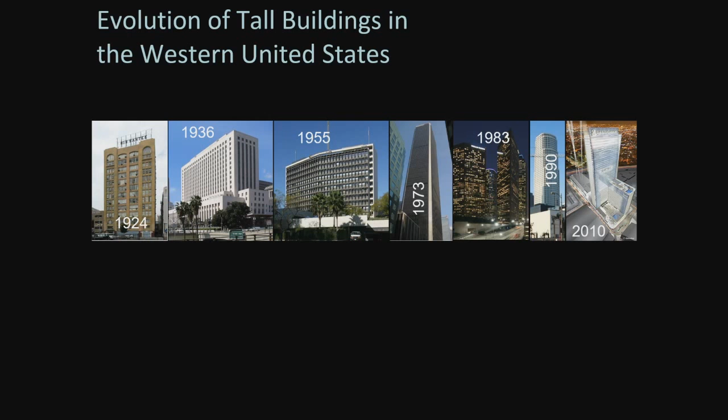Go back into the 1970s, and the software was much less advanced. We were mainly using linear computer programs at the time. But at that time, there were tremendous advances possible in construction because the computer was available and enabling engineers to extend their thinking in design and construction.

Now, 1936 was also a very important time in the structural engineer's development of computational procedures—no, definitely before the computer. This fellow, Hardy Cross, was a professor at the University of Illinois, and Hardy Cross developed some very important analysis methods, one of them known as the moment distribution method.

How many have heard of the moment distribution method? A few of you. And students have only heard of it because we tell them we don't teach it to them anymore. But it is instructive to see what Hardy Cross had to say about it.

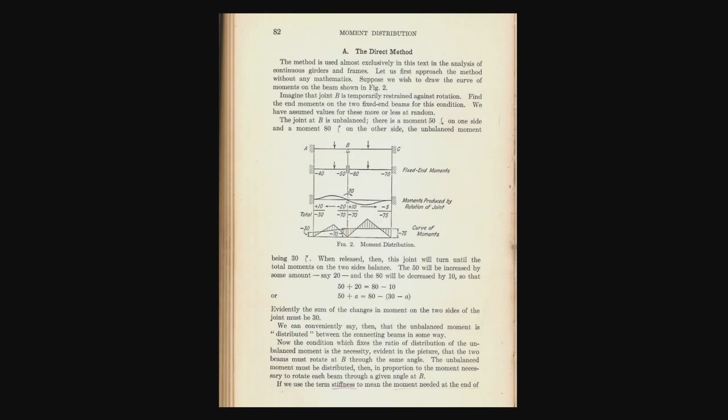The idea: if we had a beam across 3 supports and we didn't know how to solve the problem, we could fix the rotation of the middle support, apply the loads—we know the solution for that case. We can find the imbalance in moments at these supports and say, let's use linear superposition and add a moment in the opposite direction and free this joint, so there it is. Voila, there's the solution. This way of solving problems for structural engineers had a huge impact in structural engineering in the 1930s, 40s and 50s.

I understand that Hardy Cross also had some impact on hydraulics—is that correct? I think so. I doubt if you're using Hardy Cross methods there anymore either.

Hardy Cross also had some very interesting things to say about standardization, and that's a subject that ties in very closely with what I'm talking about today—performance-based design as opposed to standardization. Let's see what he had to say. He says, as the size and complexity of projects increased, it became desirable and even necessary to set up a series of routine procedures for analysis and design.

Fair enough. With these standardized formulas and specifications and methods, it became possible to use a greater number of men, and men with less training, to produce engineering works.

Now, forgive me, those were Professor Cross's words. You have to understand it's 1952. To bracket my age a little bit, Khaled, I wasn't born yet, so you can't quite blame me for this one. At the time, most of the engineers were men. Berkeley was way ahead of the times, of course.

Julia Morgan, a very well-known architect and engineer, graduated from Cal in 1894. She was the only woman in the graduating class. But apparently Professor Cross didn't pay attention to what was going on in forward-thinking parts of the country.

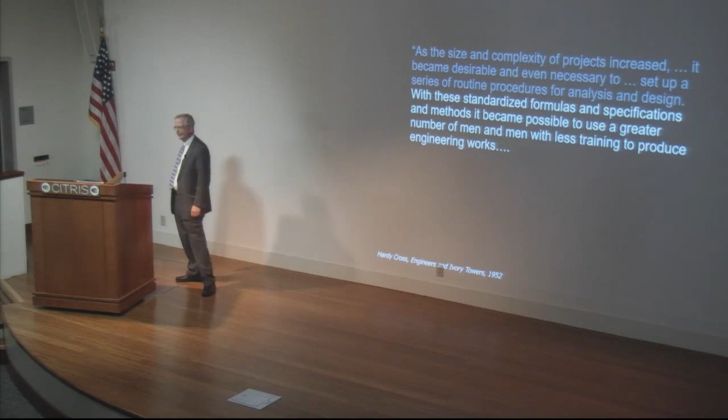But what he says here—get over the men and women business—what he says in this line is kind of shocking. It allows it being possible to use a greater number of men and women with less training to produce engineering works. And one has to wonder, is that really what standardization is about? In a way it is. In a way it is.

And he writes then, as a check on fools and rascals—the fools, those who don't know so much, and the rascals, the ones who know a lot but want to get away with something—or set up as an intellectual assembly line, has served well in the engineering world.

Hardy Cross is very often quoted because of his mention of fools and rascals. But I think this statement about standardization is shocking. I think we should consider that standardization really, in a way, is set up so that engineers can do more with less knowledge, and it'll still be safe. Just think about it. I'm not promoting that as a way forward. I'm just commenting that that's what we might think of when we think about standardization and not being allowed to design outside of that standardization box.

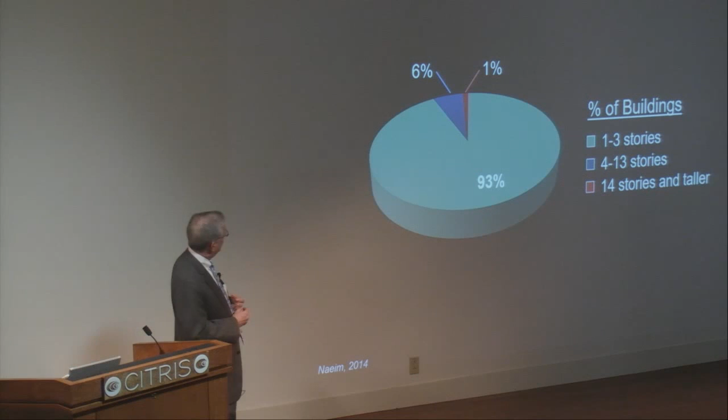Standards work really great in the building industry for most of the construction. If you look at the construction that goes on in the United States, 93% is 1 to 3 stories. Not very interesting to most of us, although there are some fascinating buildings in that group. 6% is 4 to 13 stories. The 1% is 14 stories and taller. And the kinds of buildings that I'm mostly interested in talking about today are even a fraction within that 1%.

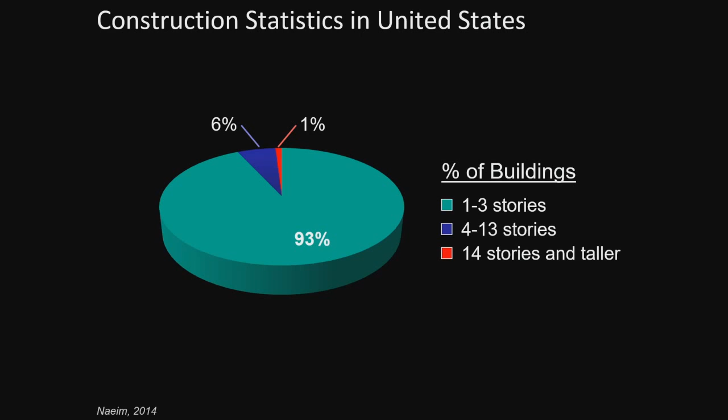It's a tiny fraction of the buildings. And it's natural that the standards that are written up are written mainly for the 93% — those are the buildings that are more routinely being designed. As we squeeze into the 1%, the standards really don't work so well, at least in many cases, for those buildings. Here's a smattering of some of the building projects that I've worked on over the years.

The top are the Bay Area buildings, the ones in Northern California. And down below is Southern California. Starting back 15 years ago or so, and then some projects that are still in the works today.

The two buildings on the right: Salesforce Tower in San Francisco is under construction and was intended to be the tallest building on the West Coast, west of the Rockies. Then along came Wilshire Grand, which is about 20 feet taller. So they've scooped the Salesforce folks, perhaps. But these are the kinds of buildings that I'm interested in mainly.

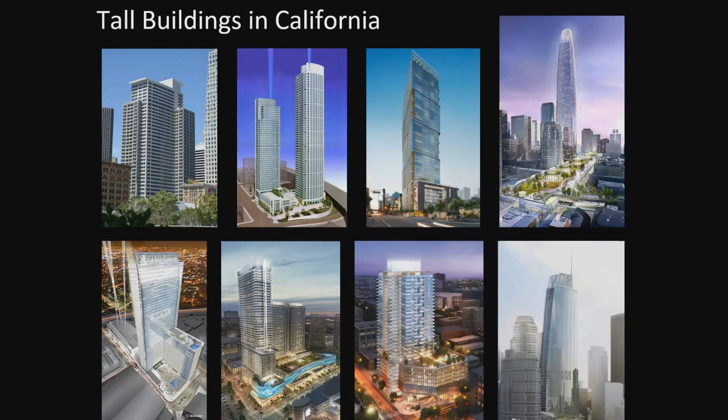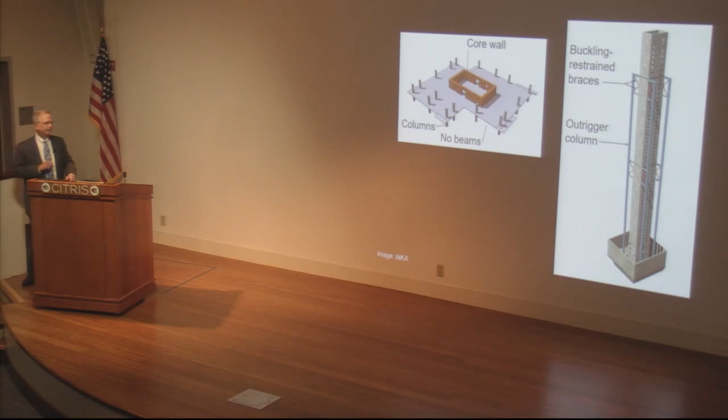These buildings are different from what's typical in our written building codes, in our standardized codes. In the code, there are height limits for certain kinds of buildings. A core wall building, a building that resists lateral loads solely by the core that the elevators and stairs are in, is only allowed up about 15 stories or so, depending on your story height — you might be able to squeeze it in there.

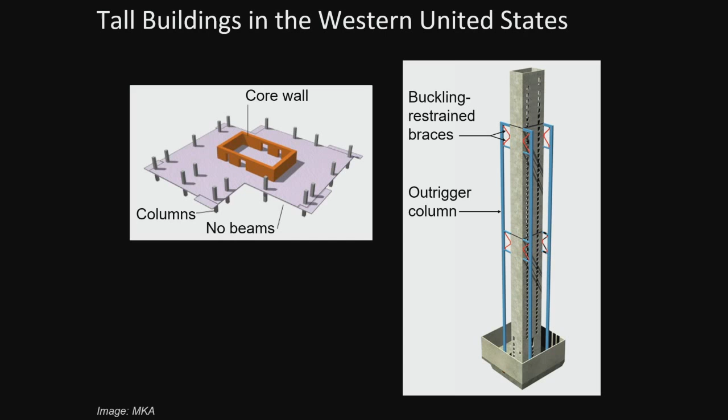These buildings are going up 60 stories tall, so they're way outside of the height range that the code was intended to be used for, the standardized part of the code. Then we're beginning to mix conventional core systems with things like buckling restrained braces as outriggers. These combinations of systems aren't recognized within the standardized code, and you pretty much have to design these by something different.

Starting about 10, 12, 13 years ago, there began to be some pressure from the structural engineering community, architects, and developers to design something outside the code that would be taller and more functional. It was kind of the Wild West for a while because engineers had no guidance. One engineer would be designing a building one way across the street, the same engineer would be designing the same building differently.

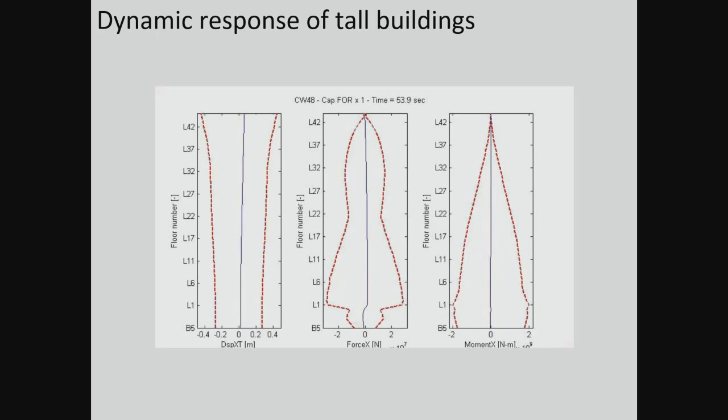There would be peer review panels checking the work. On one building, the peer review panel said, 'I'm not going to approve this building if you put that in there.' And across the street, an almost identical building, a different peer review panel was saying, 'I'm not going to let you design the building if you don't put it in there.' So totally opposite views were being expressed about how to carry on this work.

Seeing an opportunity and, in fact, a need to move practice forward, we started about the time of the centennial of the 1906 earthquake — around 2006 — in the PEER Center, a program to develop performance-based guidelines, ways to use analysis and testing and so forth to build these taller buildings that would perform better in predictable ways, but with some organization, some guidance. I worked with practicing engineers from Seattle, Los Angeles, San Francisco, researchers up and down the West Coast, and building officials.

We pulled together a program worth about $2 million for analytical work and developing guidelines, and we published this in 2010. We had absolutely no authority to do this — we just did it, and we put it out there. It was immediately picked up by practicing engineers, and it's become probably the most widely used document for performance-based design of tall buildings, not just in the US, but around the world.

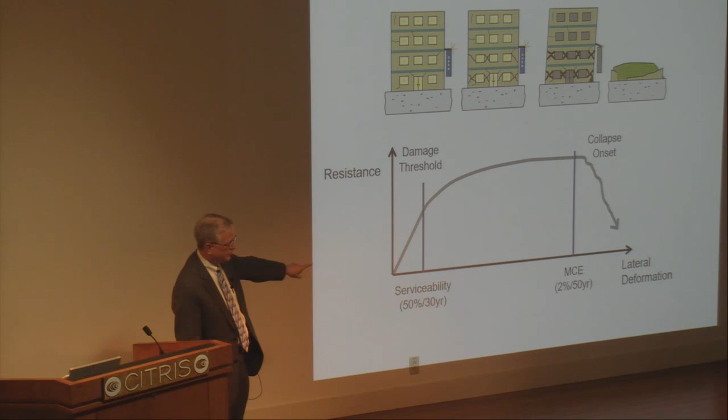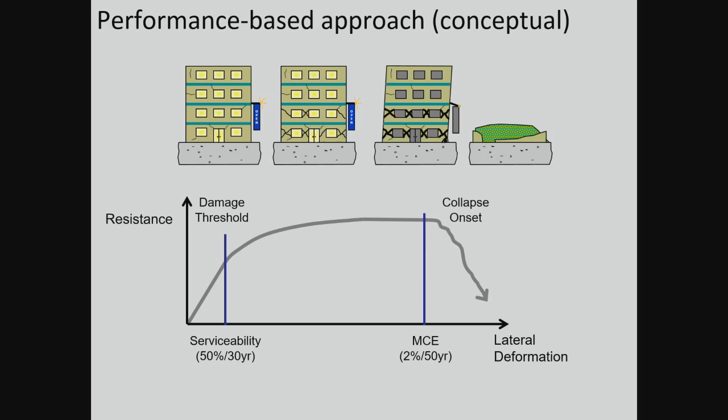And we set two limit states. One, it should be serviceable in some reasonable time frame. Two, it should have a margin against collapse for something that we think is the biggest that might ever happen. So we pick the biggest event as something that's got like a 2,500-year return period. In coastal California, we like to live dangerously, and the risk is a little higher here where we're close to faults. But it's a very rare event that we're talking about.

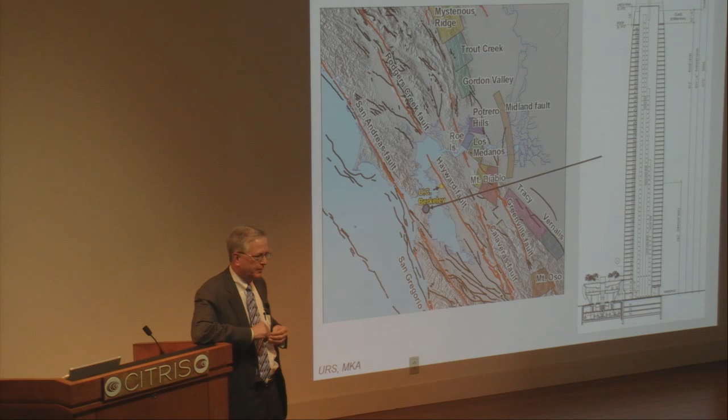Now, the way the engineer goes about this process — and again, we'll only cover this on the surface — starts with looking at the ground motion. We live in a very exciting part of the world here on the Berkeley campus. This is actually the fault map that URS used to determine what the seismic risk, the hazard map, should be for the UC Berkeley campus. So there's UC Berkeley shown there. The project I'm going to talk about, Salesforce Tower, is in San Francisco, and it's a very rich seismic environment.

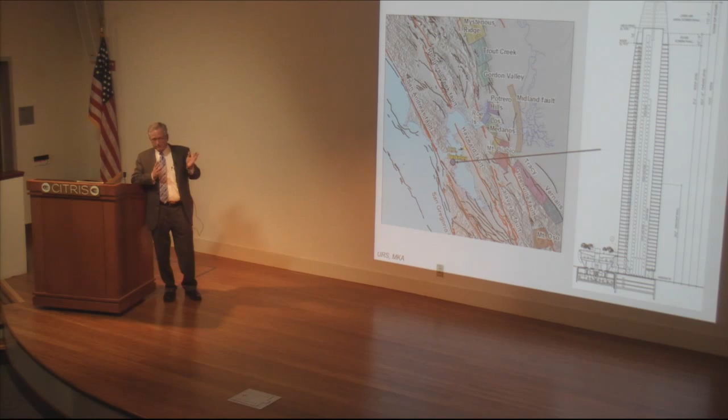Now, what's done in the seismic design of a building as a starting point is to look at all the known faults and think about what the fault segments are, what are the probabilities of individual segments going off or combinations of segments, what are the average long-term slip rates, and from that, what's the range of ground motions that you might get. If you have more questions about this, one of our experts, like Professor Bray, would love to answer — but engineering seismologists and geotechnical engineers work on this problem.

Once there's a sense of what the range of fault rupture might be, we use attenuation models that tell us how the ground motion attenuates from the source to the site. A huge amount of work has been done on this subject by the Pacific Earthquake Engineering Research Center. Is Yousef Bozorgnia in the house today? I think he may be traveling. But Yusuf had a tremendous amount of work related to this in the PEER Center, really using huge databases to figure out how to attenuate the ground motions from source to site. And the PEER models are really all that's used today in figuring out what the design ground motion is going to be.

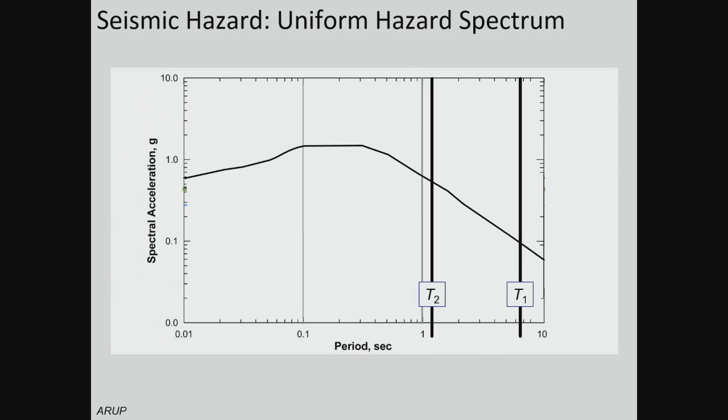Now, there are site analyses, of course. We can estimate what the rock does, and filter that through the ground. In the end, we end up with a response spectrum, which gives us a measure of how a linear structure would respond, in this case acceleration, as a function of its vibration period. Most structures that fit within the prescriptive provisions of the code sit back in the 1 second period range. The buildings we're talking about are off at 4, 5, 6, 7 seconds as their initial vibration period, so they're way out in the response spectrum. This spectrum is used to define the shaking intensity at a site.

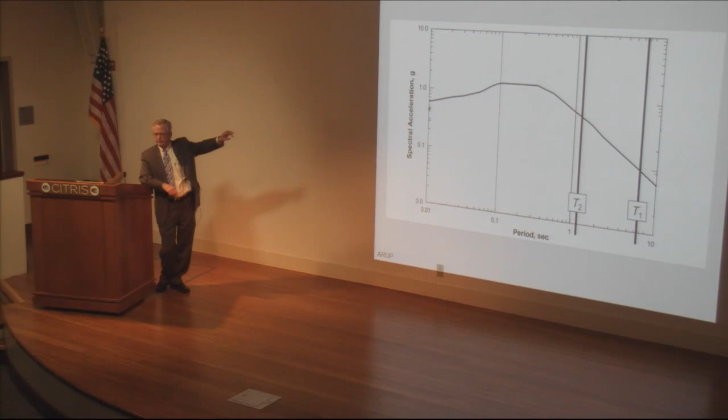There are techniques for filtering ground motions to fit them to these particular periods. I'm a structural engineer, and given time limits, I chose not to cover all that. But ground motions are selected that are representative of the seismic hazard, at the low end as well as up at the high end of the hazard level. It could be for long periods, for the fundamental period of vibration, and for shorter periods. One key thing in setting up the ground motion is making sure the duration is long enough to excite the building and is representative of the hazard.

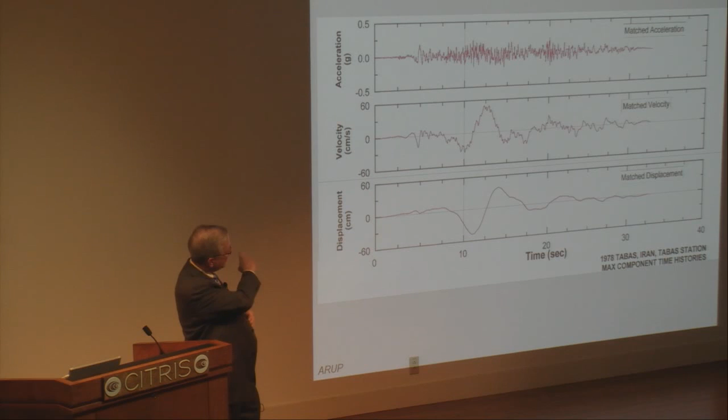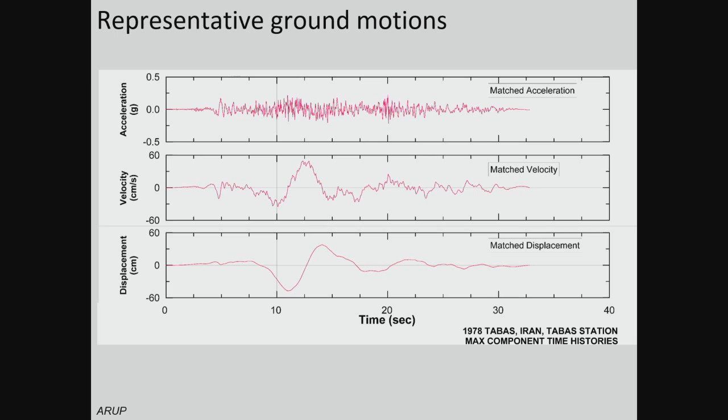If we're in the near field, like on the Berkeley campus, very close to an active fault, we'd want to include an impulsive motion or a number of impulsive motions to excite the structure. Our geotechnical engineering faculty at Berkeley are among the top experts working in this field. Professor Bray participated in the review in setting up some of the ground motions with Arup, who was the engineer of record on this project.

On the structural side, we take the building as it exists and boil it down to something much simpler, an analytical model, quite unlike what we do in the prescriptive code provisions where all we would model is the core. In performance-based design of a building, we model all of the structure, everything that might affect the behavior of the structure and everything that might be affected by it.

So we've got the core modeled. We would model the slab column framing connecting to that, with very complicated, detailed models of how the structure enters into the basement and is fixed into the ground. But the computational procedures today, for the most part, aren't sufficient to allow us to model both the structure and what the soil's doing in routine designs, even for these very tall buildings.

So what we do is generally fix the bathtub, the basement. We model the structure, do the calculations there, and then come back and apply what we get from the superstructure back onto the foundation. There's still some advancement to go on there. The models are simple and yet very complicated.

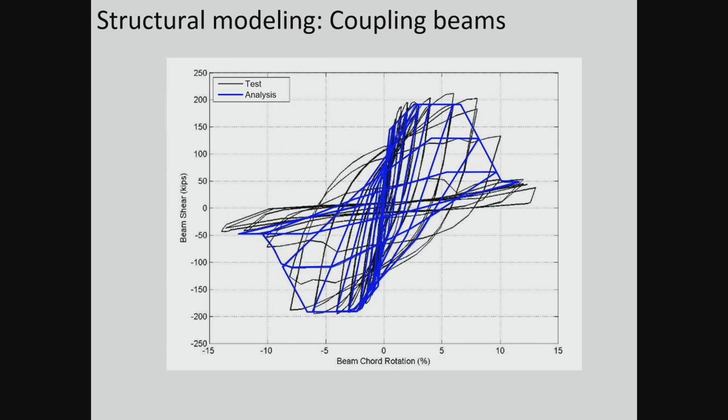This is a typical load versus displacement response for a coupling beam. We're modeling the full nonlinearity and the degradation that occurs at large deformations. Here's what a computer animation might look like as the ground motion starts.

And it's very quiet, but it would be very noisy in that building. It's quite possible one would be seasick up at the top. But if you lived to tell your grandchildren about it, it would be okay.

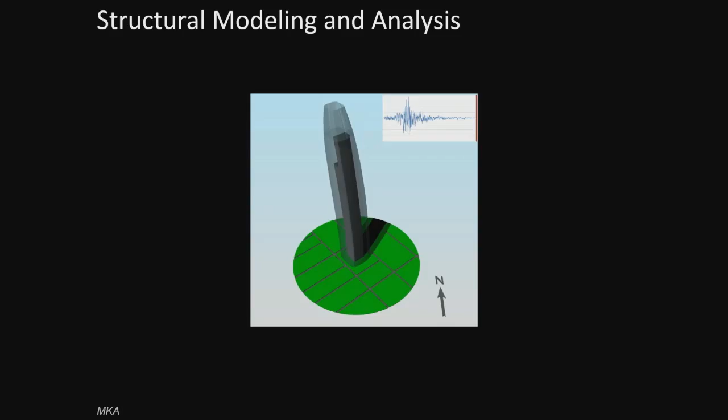Now, these displacements are greatly amplified, okay? So it's not quite that bad, you're not going to be thrown out. But up at the top of Salesforce, one would anticipate the motion to be about 4 feet, plus or minus, not including whatever the ground rigid displacement is. So they're big movements, and seasick, probably, okay?

And then one takes what one gets from the analysis. All sorts of things come out. One of these analyses takes about a day to run, just on the fastest computers we've got. It takes about a day just to run this darn thing.

And we get shear forces, very concerned about shear forces in these core walls, because the core is supporting not just lateral load, but the vertical. So we want to be very sure to get this right, and we can't get this right if we use the prescriptive methods in our building codes.

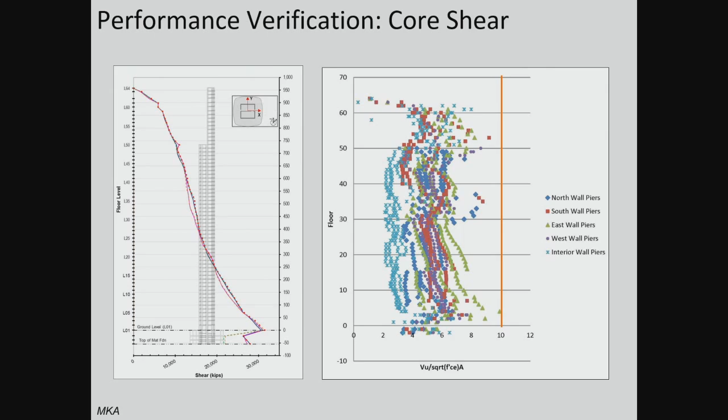It's just not adequate. We look at what the strains are over the height of the building, these are strains in the concrete or the rebar in compression or tension. Professor Filippou, you might note the strains are very small in this. So we may be yielding at some location up at the top where the core cuts back.

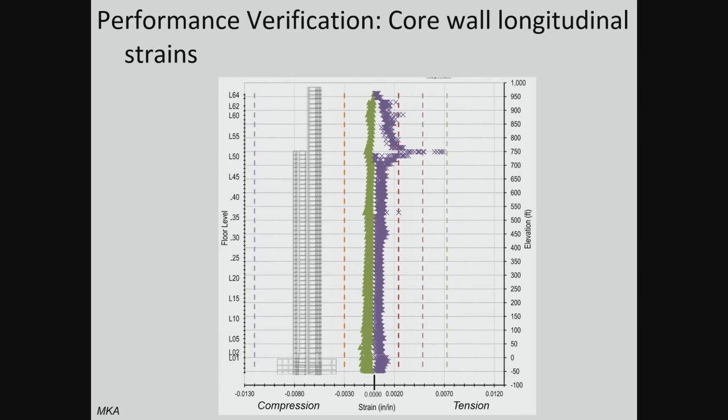The compressive strains are, in this case, well below what we would think to be spalling or crushing strains. These buildings don't develop very large longitudinal strain in the core walls, and that's a good thing. It means the damage is likely to be somewhat lessened.

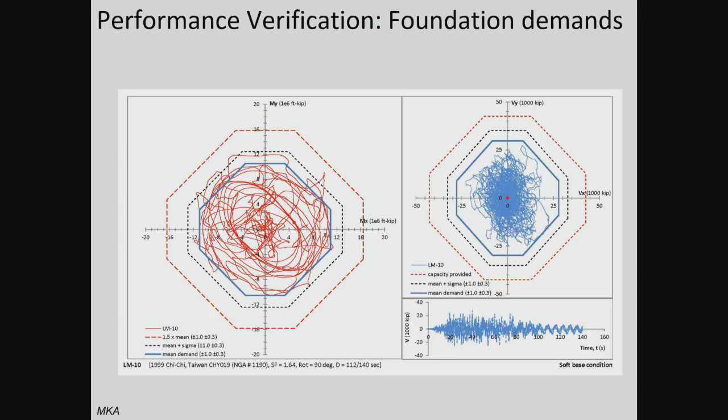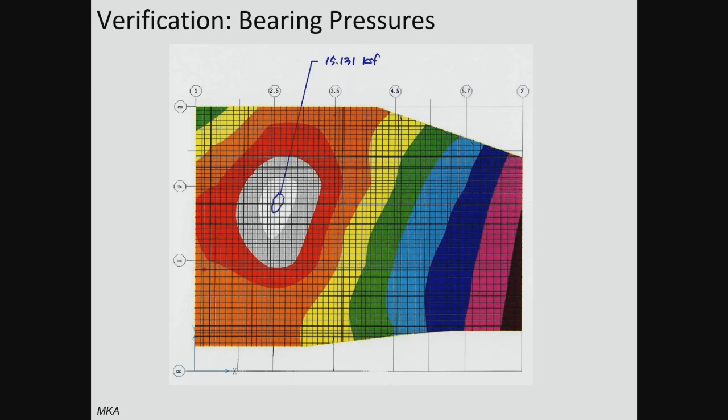We also worry about what's going on in the foundation, so what's done is to look at the moments and shears that come in from the core coming down onto the foundation mat. A typical practice is to plot orbitals of how that moment varies in different directions, then apply that in other software to look at the bearing stresses, and also examine the stresses and forces in the concrete mat that supports this thing.

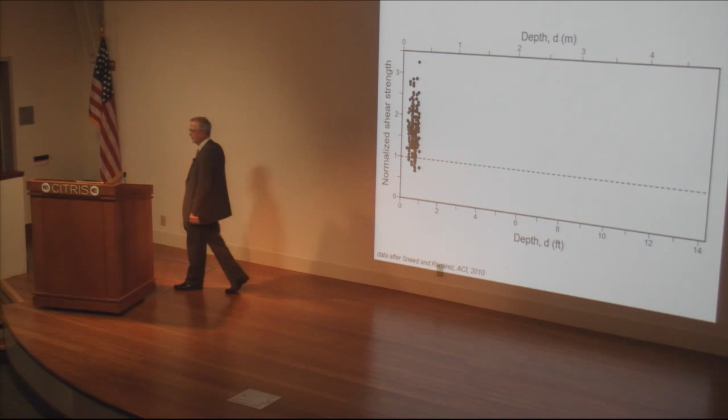Now, I have to give a little plug for large-scale structural testing. Shear in plain concrete has been studied for 100 years. But the early studies, hundreds of them, all used little specimens because you could build lots of them and test them easily. After enough of those were tested, and there were more, I got tired of drawing points.

Somebody said, let's see if this scales. So they went to 2 feet thick, and things got a little weaker. Somebody said, well, if they're getting a little weaker, maybe we should try something thicker. And things looked like they stabilized, but it wasn't quite sure. The typical foundation mat for one of these buildings is 10, 12, 14, 18 feet thick. It's way out there where we haven't tested anything.

How many have taken an undergraduate class in foundation design or concrete design? Some hands. How do we teach you how to design the footings? You make them thick enough so that you don't need shear reinforcement, right? And all the theories that we've been using for years are maybe not quite right.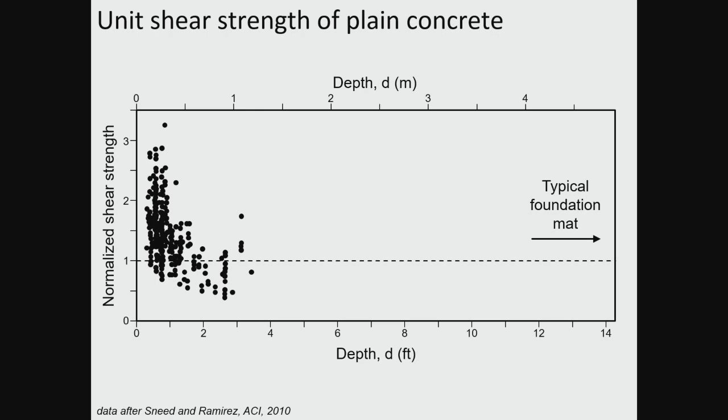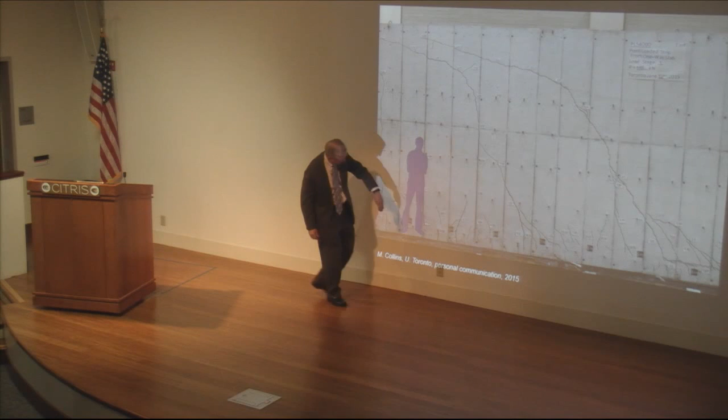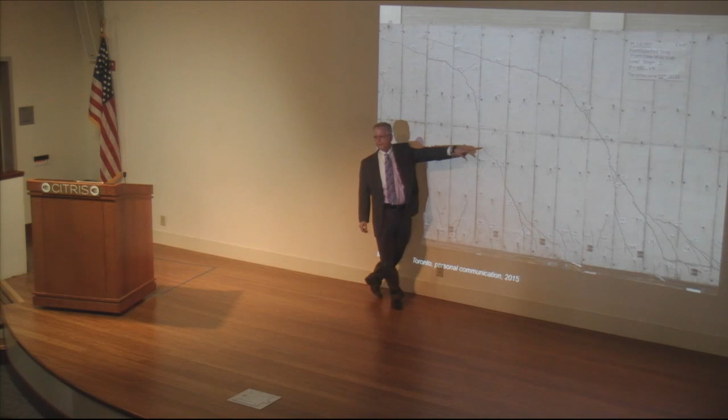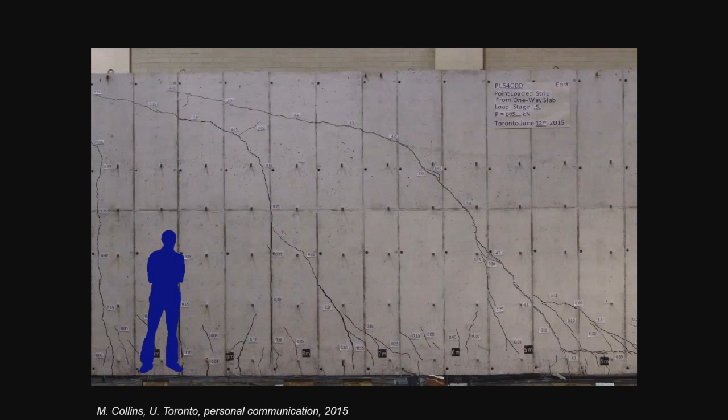Notice the cracks that are marked. At the bottom where the beam is in tension, the cracks are very closely spaced and relatively narrow. As we move up through the height, the cracks tend to all branch together into relatively few cracks, and so the width of the cracks is greater. This is a problem that happens as the member gets thicker. The performance that you measure in something shallow doesn't scale. The wider cracks that occur upstairs mean that the aggregate don't lock together in the same way, and the unit strength goes down. So what did Professor Collins get?

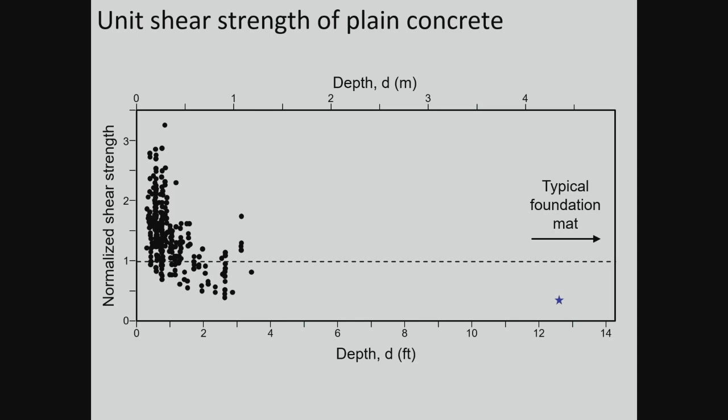There it is. Where's it going to land? There. Okay, way down there. Now, fortunately, there were researchers involved with this problem, advising cities about the possibility that this might happen. And we changed practice in these tall buildings, requiring that all of these be designed with shear reinforcement. When we put shear reinforcement in these things, we know that the problem goes away.

So there's a guy in one of these mats. We'll return to him later.

So, what are some of the benefits of performance-based design as I've described so far? Well, we get a better understanding of performance. What's the real response to earthquakes? We get a greater assurance that the basic performance objectives will be met. But remember, all we did when we look at this is say, let's make sure that the performance is serviceable for moderate quakes and that it doesn't show collapse for something big.

Where can we go from here? Well, there's lots of places we can go. If we come back to this figure about performance-based earthquake engineering, in 2001, we invited Bill Holmes to a PEER meeting and said, where can we take this? What can we do next? And Bill said, well, what you really ought to be doing is talking about performance of buildings, not in terms of cracks and crushing and spalling and so forth.

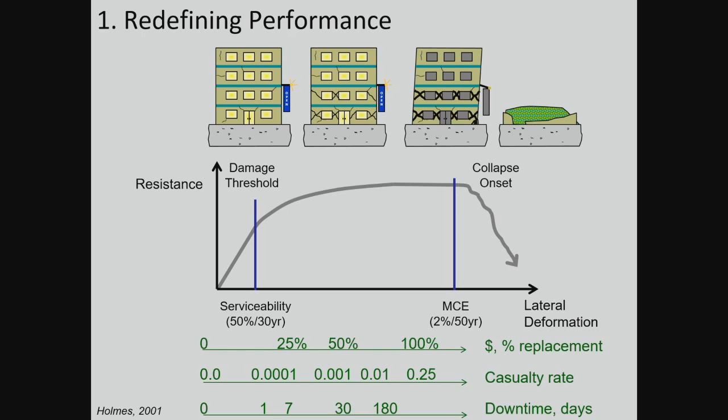You should be talking about what it costs to fix the building, what's the casualty rate, how long is the building going to be down. So we undertook an effort in PEER to try and figure this thing out. You start at one end and say, well, what's the decision variable? Maybe it's money. Money for repair cost depends on damage. Damage depends on how the structure responds. How the structure responds depends on the ground motion. And then we've got models for what the ground motion is.

Well, this is a very neat little problem to break up into 4 pieces because you can get the experts in each discipline working on what they're best at. One of the guys working on this came up with this little formula: the PEER triple integral based on total probability theorem. And love it.

Our social scientists in the project looked at this and said this is oversimplifying the problem. And anyway, the real problem is that to integrate this for real structures is almost impossible. So I got an idea and worked with one of my students. I got a deadline is what I got.

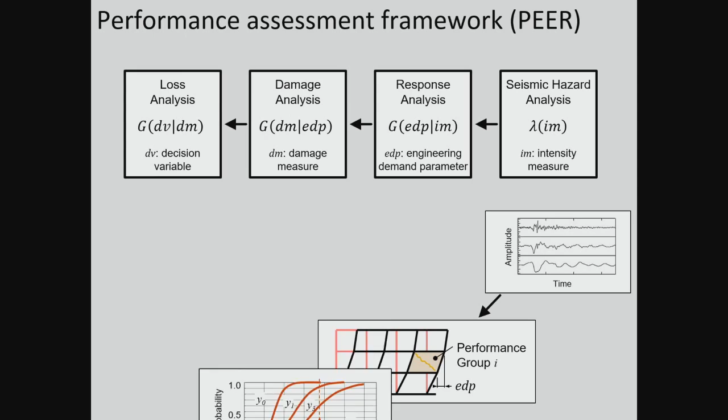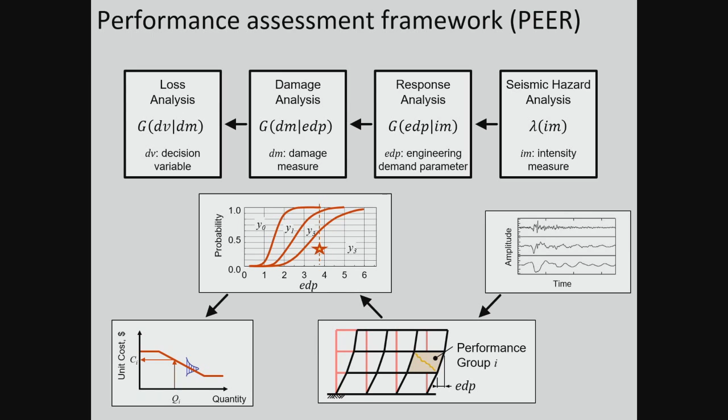We said, look, we can pick a ground motion, we can analyze a building once, we can find what the drifts are, we can go to a fragility curve, something that tells us what the damage is given that drift. We can then add up all the damage that has occurred and figure out what it's going to cost, and then we can solve this problem. Big problem is, though, it takes about a day to run one of these tall buildings, and you need hundreds or thousands of these analyses to get enough statistics to know what the answers are. So that didn't work.

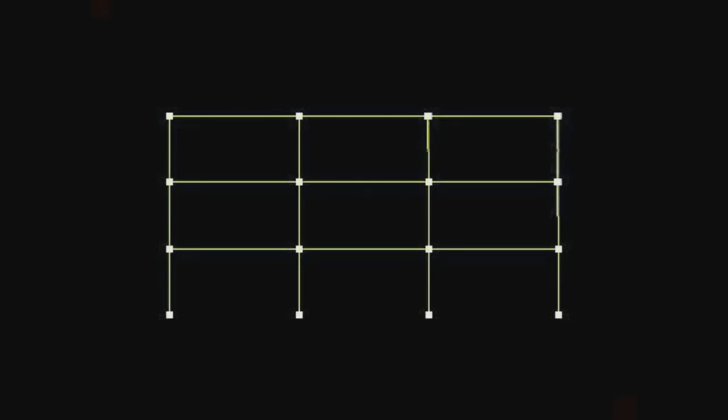So we decided to try to do it statistically. I worked with Professor Der Kiureghian, very glad he was around to help figure this problem out. He said, oh, we can just do this with statistics and generate solutions. But you're going to have to be careful because, as you know, when a building vibrates and moves, the movement at one level is correlated with the movement at another level. You can't just grab statistics on one level and forget about the other. You have to get their correlations sorted out and keep track of that. And thankfully, Professor Der Kiureghian knew how to do it, so we incorporated what he gave us.

The idea was that if your responses are lognormally distributed, if you take the log you get a normally distributed variable. You can run through some simple MATLAB routines—I learned who Mr. Cholesky was—and back out, take the exponent, and you can statistically reproduce what analyses would give you if you have at least a sampling of the results. And this is how fast it goes: by the time I'm done with my talk, we'd have our 1,000 analyses done, even on a 60-story tall building. So we can get the correlations all organized and do it sensibly.

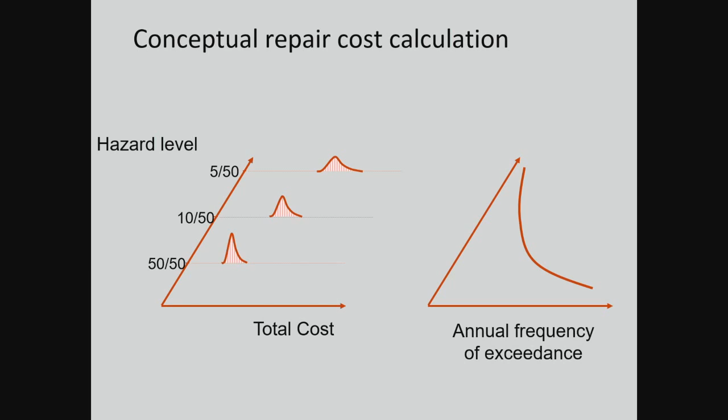And then we can start talking about what happens in frequent earthquakes, rare earthquakes, really rare earthquakes—what's the cost? You can integrate over a hazard curve to get an annual frequency of costing so much. And then you can start making some better decisions about performance of a building.

So we did one study looking at 9 different buildings, but here's just a pair. We did a standard design by the code and another design that was performance-based. We hired real engineers who designed these buildings, and we hired a cost estimator who told us what it would cost. There's good reason why developers like these buildings—that's $6 million they can put in somebody's pocket, their pocket, right?

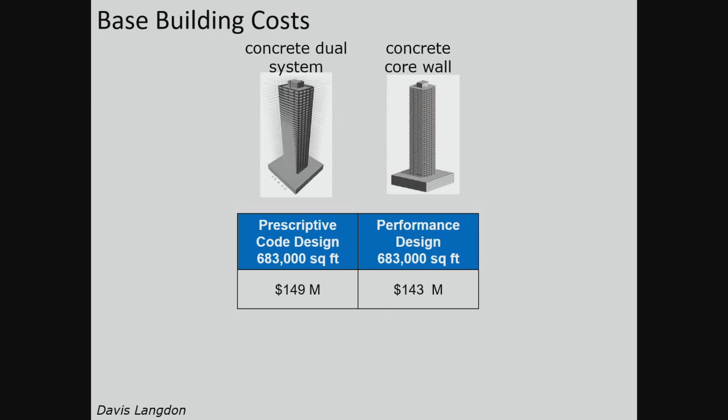And then we run through this kind of routine and calculate what's the mean loss that you get out of these buildings. Lo and behold, the performance-based design, the one that you save money on, does better. So there's really a return on this.

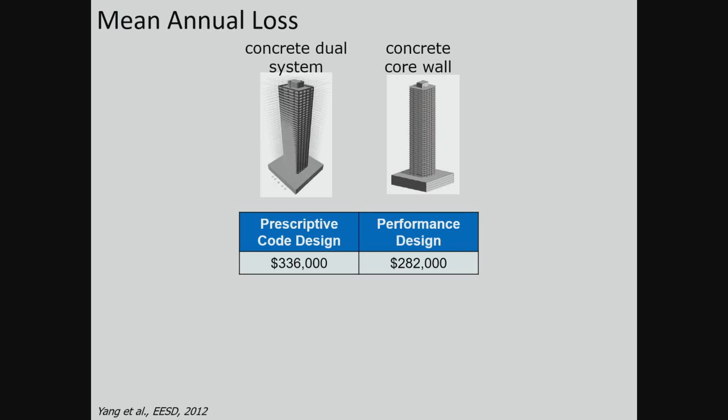So one of the questions I ask myself is, well, what's next? We really need to make more out of this kind of analysis capability. We gave this software to the Federal Emergency Management Agency, and they incorporated it into their ATC 58 performance methodology. So this is now available, and engineers are starting to use this, not just for repair costs but downtime and casualty. So it's out there, and I think it's going to start moving the profession into some different thinking.

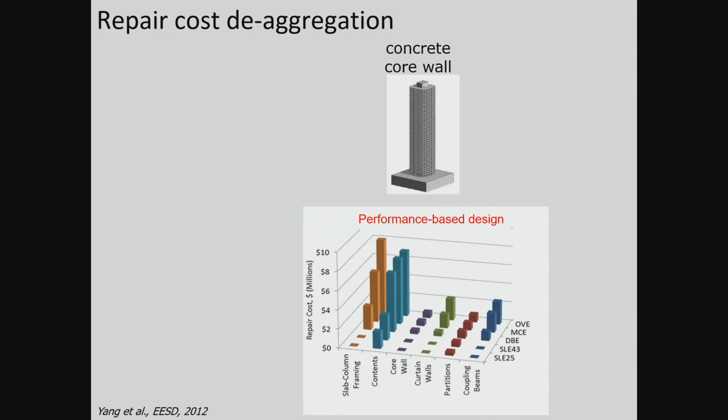Once you calculate the repair costs, you can also find out where they are. So you can begin to think about optimizing your design to reduce the losses from the elements that are giving you the greatest loss. In this example, the slab-column framing, which is just the gravity framing, is not where the costs are. Anyway, too much—where else can we go with this?

Well, maybe we should start thinking about the kinds of structural systems that we design. Current design is based on ideas that have been around for 50 years, and they use more or less conventional framing. There are yielding zones in the conventional frames.

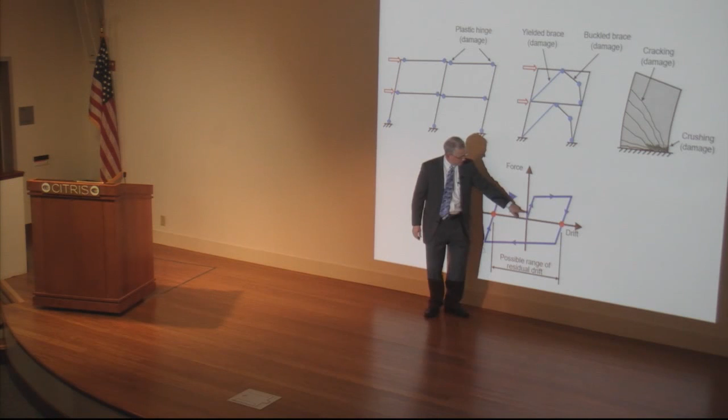We detail buildings so that they can survive the motions that are input, but you still get damage, like concrete crushing or member yielding. You also get the problem that if the earthquake stops, that's where you end up, with a big residual drift. Maybe we can do something a little better than that.

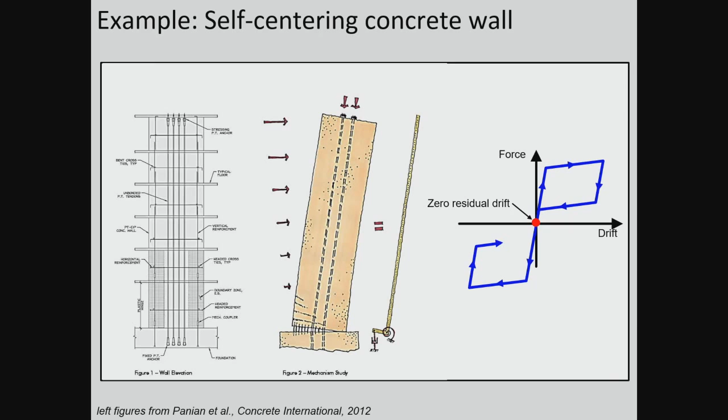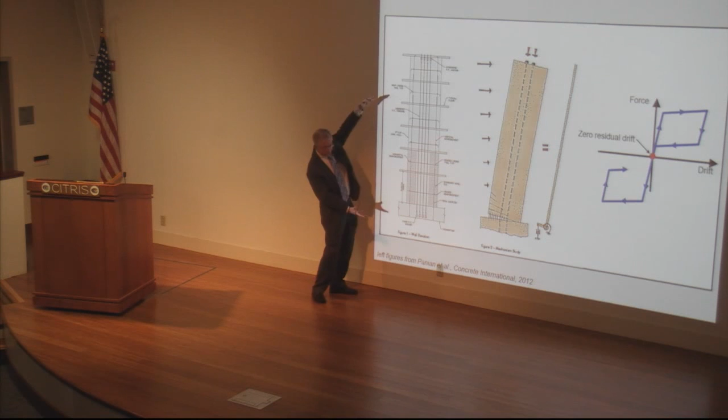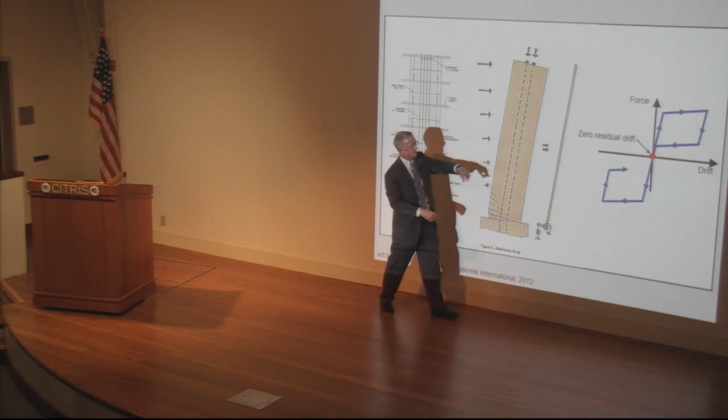There have been ideas developed on self-centering systems, and systems with replaceable fuses. This is one example that Tipping Mar, now Tipping Associates, developed and tried in some buildings where you pre-stress the wall. You could have replaceable fuses in these zones to dissipate energy. When it yields, it simply rocks about the base, and the pre-stressing clamps it back, pulling it straight again. So you get this force displacement curve and theoretically end up back at zero drift, which is pretty important.

So we said, hey, let's figure out if we can actually do this. Does it really work in practice? You can do this at a small scale, you can do it on a computer, but there's nothing like doing it full scale on a shaking table. So we went to Japan.

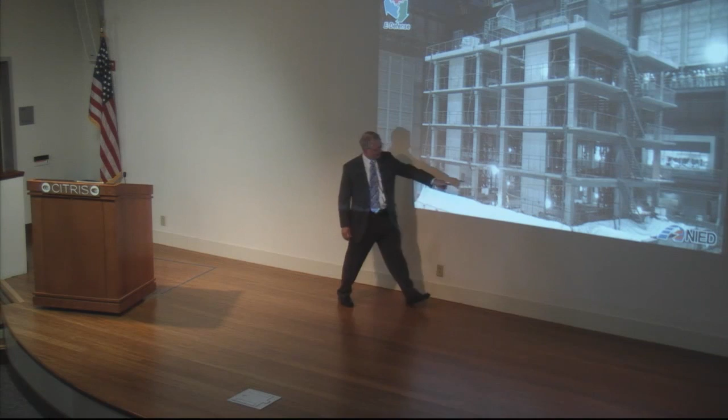We'll play it again. What you got here is two nearly identical buildings, full scale. This is the conventional concrete. You can see the damage that's occurred there. Uh-oh.

Let's do it the manual way. This is one of the ground motions, the Takatori motion, measured in Japan during the Kobe earthquake at 60% of its full intensity. By the way, we sit next to a fault, not so unlike what did this. This is 60%.

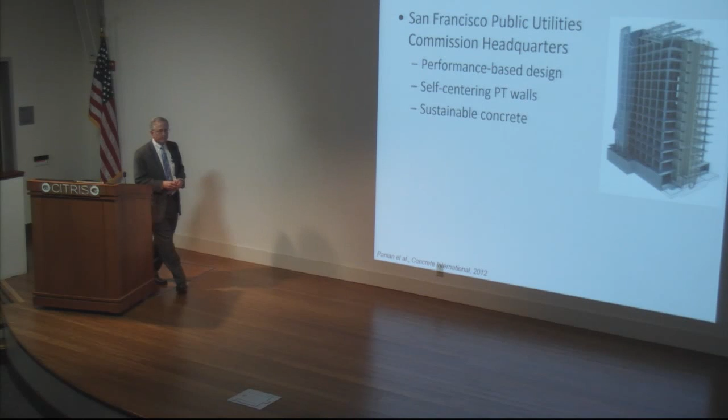Good thing, because some engineers are starting to use systems like this. Never yet for a really tall building, but for some moderately tall things in San Francisco. The Public Utilities Commission headquarters, some of you know about this building. It's performance-based design, self-centering walls, and sustainable concrete. I think they replaced 70% of the cement with fly ash in this system. So sustainable all the way around.

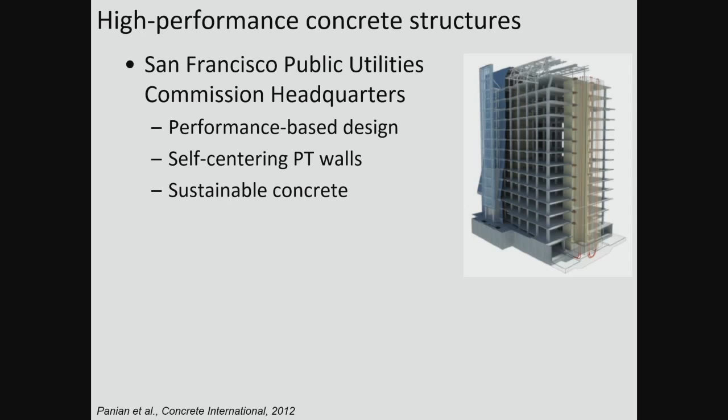Why are engineers designing these crazy things? Does anybody know? Architects want them, that's one reason. Who's in CE 120? Anybody in here in my class? Why do we make buildings with curves or irregular surfaces? Yeah, the wind doesn't like those irregular things. Great, I'll remember you.

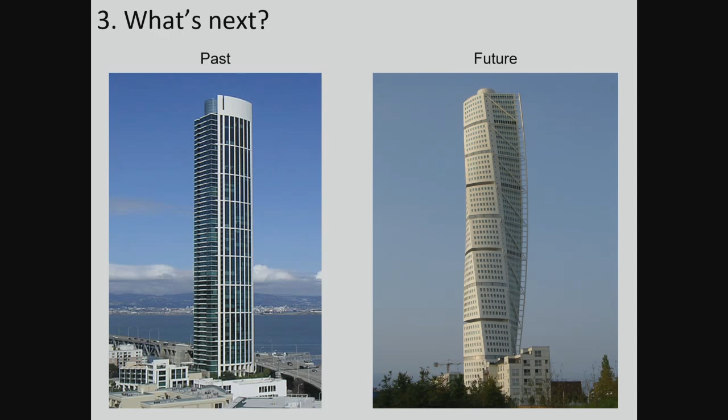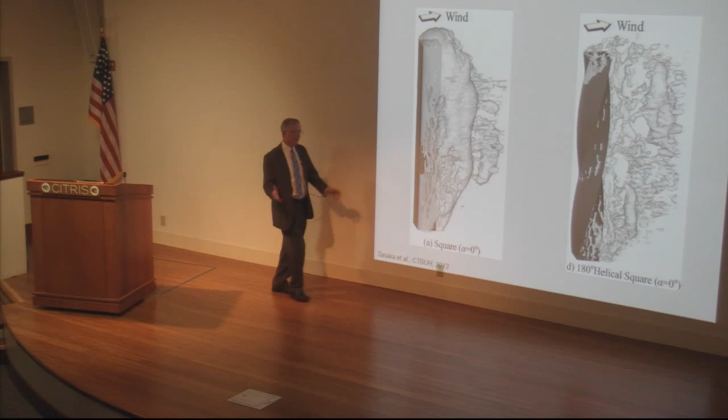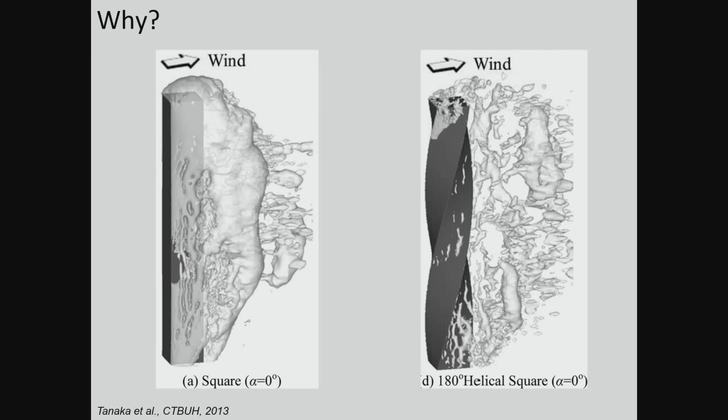Here's a simulation of a rectangular section. Look how the vortices go around, up the whole height uniformly, and that really sucks the building to the side. Then the vortices go back and forth, very uncomfortable building to be in. Look at that one, the irregularity fools the wind, and the occupants are much happier. Whoever said the architect wants it, that's really the reason why it goes that way.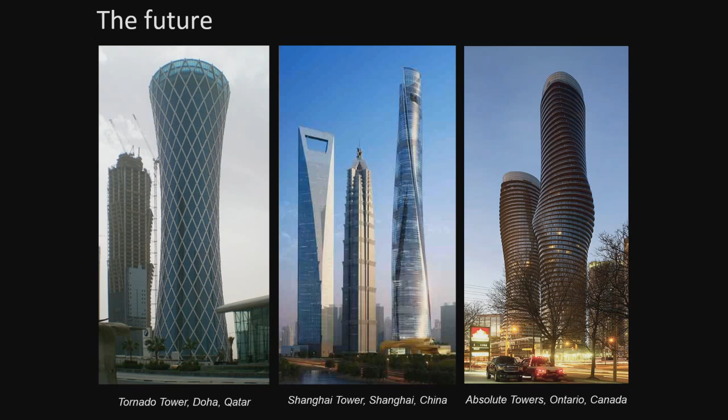But this is what we're going to come up against, and the analysis and simulation of these things is going to be much more challenging as we go forward. The other buildings we understood intuitively, we were just confirming what we thought we understood. Here, it's much more difficult to understand what's going on, and we're going to need better software to handle these things with greater confidence. The Disney building was performance-based design by a graduate from Berkeley.

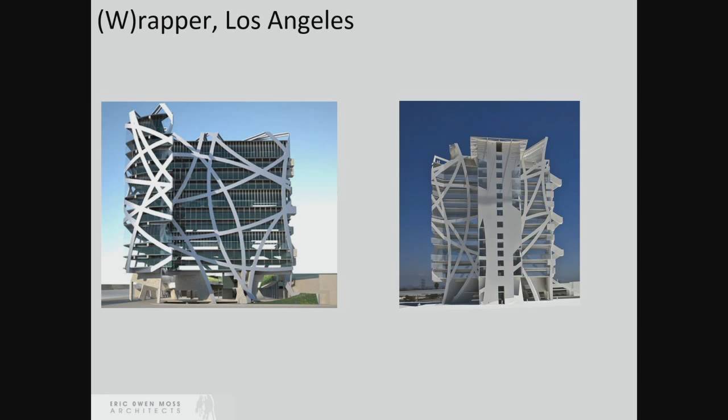What's this? It's the Wrapper from Los Angeles. And this thing is, I think, ugly. I think it's terribly ugly. And you wonder, where's the structural system? Well, if you take a look from this side, you can actually find something that looks a bit like a coupled shear wall buried inside of it. So it's got some conventional things. This design has no columns, everything is in these strips, which I've heard they're thinking about 3D printing in some way. I don't know how you do this in concrete, but it's fascinating to imagine 3D printing of reinforced concrete construction. That's, I think, what's next, moving in these fascinating directions.

And then the fourth thing is about risk categories for tall buildings. This looks too detailed, but in our codes, we have category 1, barns, right? Chicken coops.

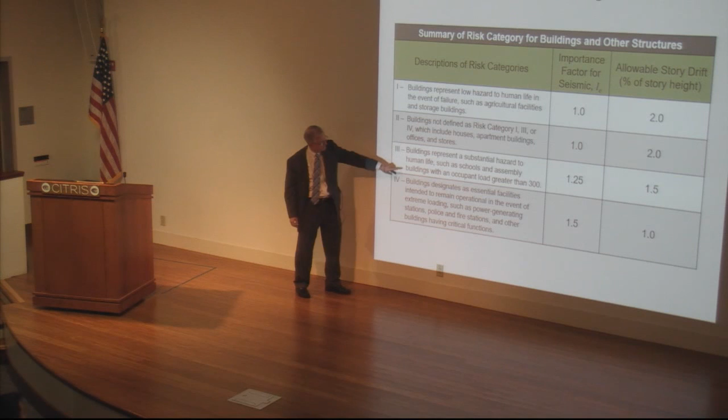Category 4 covers critical functions like fire stations. Category 3 covers schools that are important but not essential. Everything else fits into category 2. So like this building, only 150 people can be in here - this doesn't become one of the 300-or-more category. This is where this building falls. Where do you think a tall building, 80 stories tall, falls?

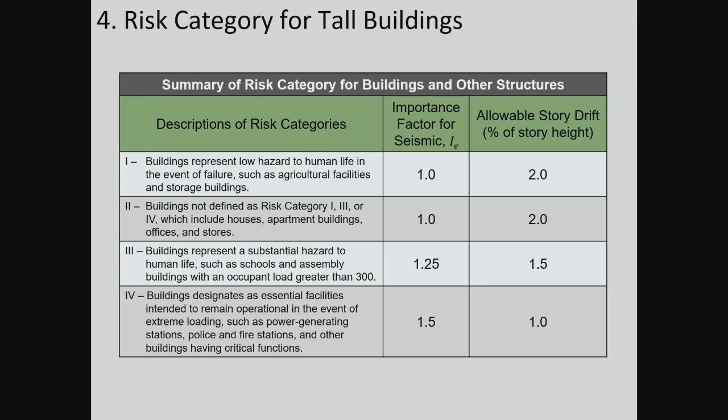Risk category 2, automatically, because the occupancy never gets above about 5,000. Typically it's 2,000 to 3,000 people in one of those buildings. So they don't get bumped into this high occupancy category unless they have a big auditorium associated with them where there's 300 people in one room. And so it begs the question.

What's different about a tall building that we should be thinking about? Well, how about 10 tons of trim landing on your building? That doesn't sound very appealing. What about all the cladding that's on this building? We design it to stick to the building like scales on a fish, but it's got to stick there for the maximum ground motions we anticipate we might get. That's really important.

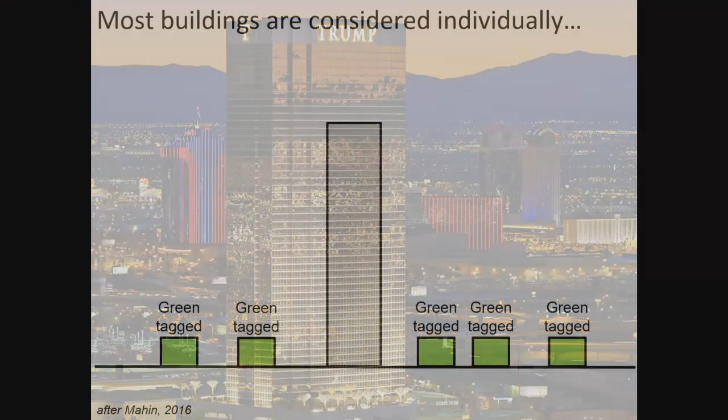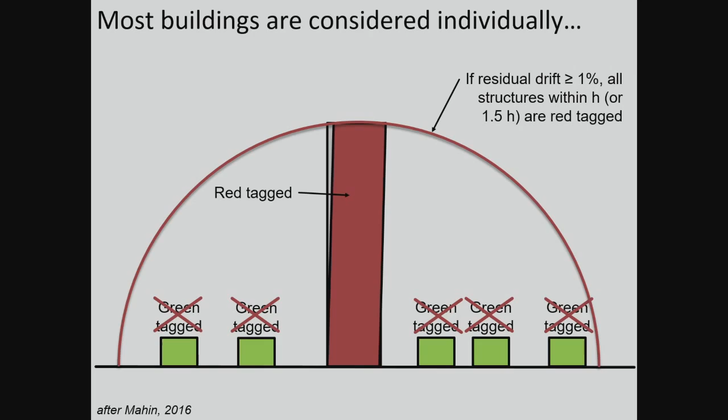Here's an engineer's rendering of a building. Suppose the building has residual drift of 1% after the next big earthquake, and it's surrounded by a bunch of green-tagged buildings. Well, maybe if the residual drift is 1%, it's a risk to the surrounding buildings, and everything around it gets suddenly red tagged instead of green. Maybe we shouldn't be designing individual buildings as individual buildings, but as members of a community.

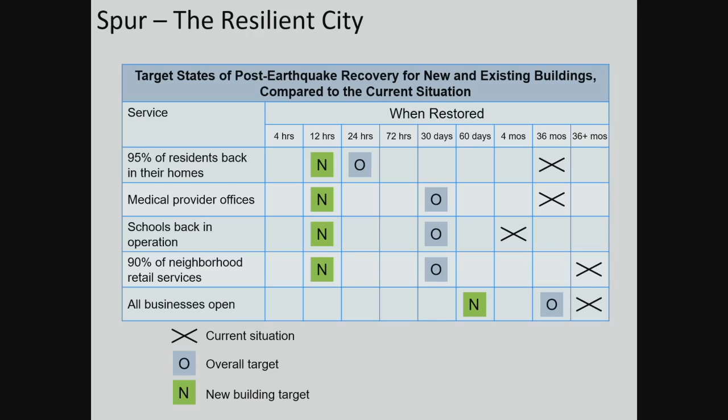We guessed at where we are in different kinds of resiliency - what's the time to restoration, what we thought was a reasonable target. To get there, because there's so much existing construction, maybe we need to aim our new buildings at something higher than that. We've got the tools to do it now - performance-based engineering and all the things we talked about. We don't have the research to support this; this is just somebody's thinking. This is another thing going forward that I think we as a community need to spend time on - quantifying and verifying these things as what we should be targeting as we move forward.

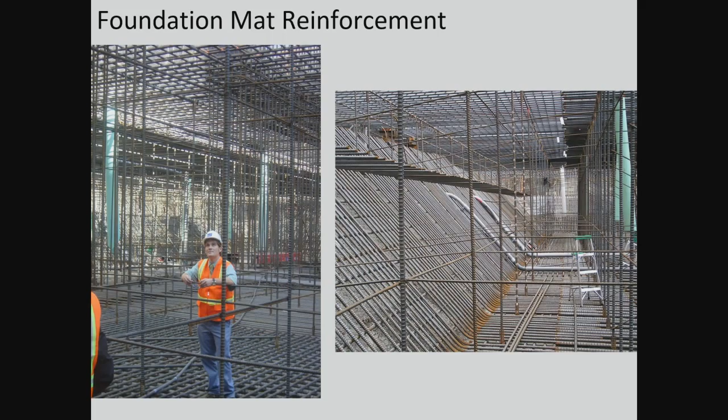Back to this guy - he's still in there. I think he got out eventually. But I think it's fun, as an engineer who works on these projects, to watch how these actually get built.

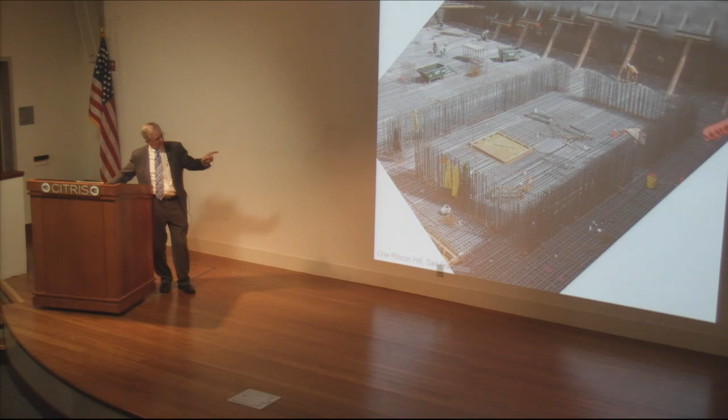So here's some quick photos. This is what's in a conventional core today. This is the One Rincon Hill - those are real people down there. Here's a building going up month by month, and it's wonderful to see how these are built. They're built so that the core goes up first. It looks unstable until the rest of the building comes along.

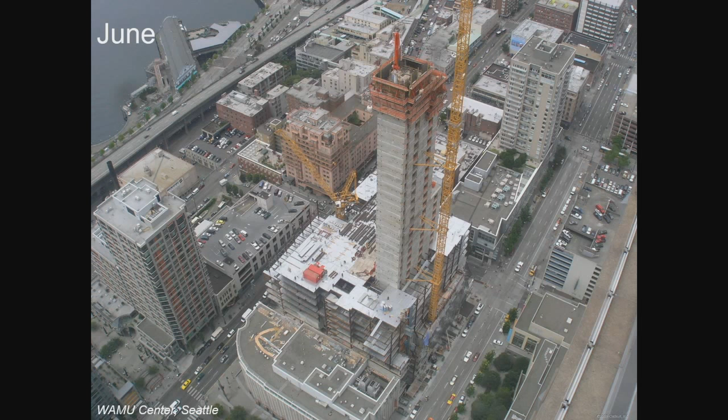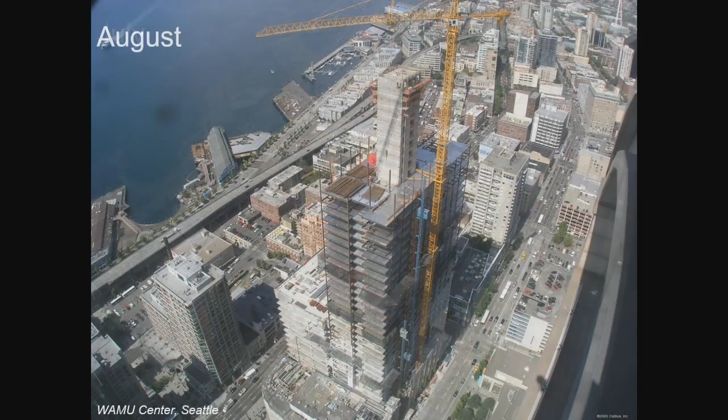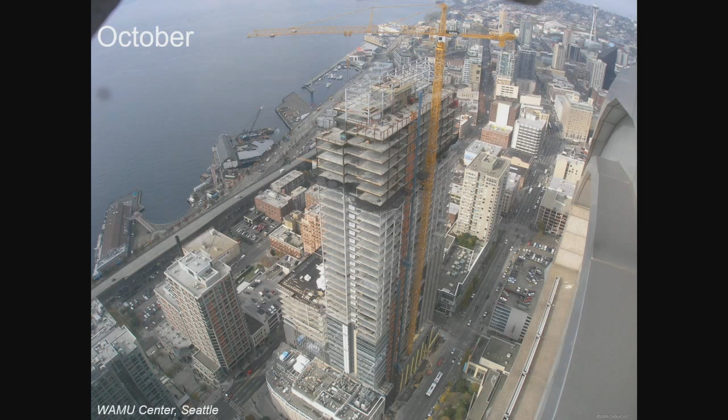But in reality, the core is holding the rest of the building up, of course. One union works on this part of the building, then the next union starts down there, so now you've got people working in two shifts, and that catches up. Eventually somebody starts putting - not yet - there we go, another group comes in and starts putting the cladding up on the building and begins working. Now you've got several crews working simultaneously on the same project.

But equally important, what we're building is not just buildings for their own sake. We're putting buildings together for the people who live in them and the people who work in them, and the economies that they support, the houses they support for people who live in there. The entire community is really depending on these buildings to function properly. So I think as designers, engineers, and researchers, we should be thinking about how these big buildings fit into our big cities.

They're not just isolated buildings anymore. They're something special, and I think they should be designed differently.

I think it's going to come through advances in simulation. It's going to come through testing of unique systems. It's going to have to come through new sustainable concretes and other materials that we develop. It's going to have to come through people who are thinking about how the city as a whole works, and how our part as structural engineers and civil engineers fit into it. With that, I'll leave you with those thoughts, and thank you for your attention.